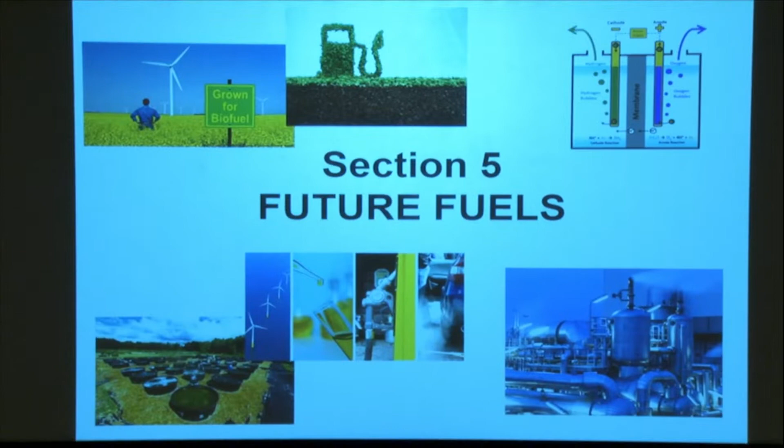I guess the reality is, historically, combustion has made up a very large part of our energy supply. From about the 1950s onwards, as the world has developed since the end of the Second World War, the utilisation of energy has grown massively - first in the West and in Europe, and more recently in China, India, the Middle East and other countries.

People are always telling you coal combustion's been used for decades and we'll still be using combustion for more decades. But the reality is this continued unabated use of coal, crude oil and natural gas, which has grown so much over the last 70 years, cannot continue unabated, because we will never reach the goals of the Paris Agreement, which is to get to net zero by 2050.

But why are we finding it so hard? The reality is that these fuels are relatively easy to extract and relatively easy to use, even though for the most part we're not using them at huge efficiencies. So it's quite a difficult habit to break.

Unless we put more effort into energy efficiency and reducing our demand, we've got an awful lot of energy demand to replace. And I don't think carbon capture and storage is really going to offset this huge amount of fossil fuel energy that we currently have. So we're looking towards new energy systems.

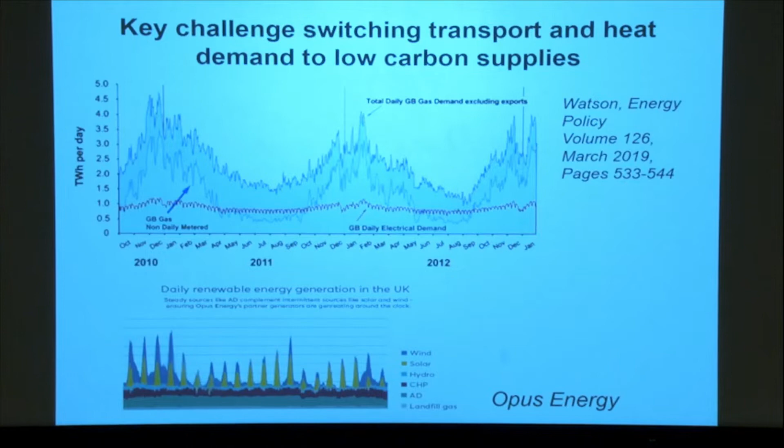But now we're getting to the stage where it's becoming difficult to utilize energy, and the offshore wind industry is growing still, which is a good thing. The problem is that if we look at our daily supply, it's intermittent because solar is only during the daytime, and will vary depending on weather conditions. So when it's cloudy, like it is here today, the supply from solar will be reduced. And wind also fluctuates according to the climate and the daily solar cycles.

Some days we have a huge supply of wind energy in the UK, but other days we get calm conditions where we get very little energy from wind. We've got a nuclear baseload and a hydro baseload, and in the UK at the moment, when wind is low, we have to top up with combined cycle gas turbines.

As we grow our wind capacity, this intermittency as an overall part of our grid is also going to grow with it. And that creates problems, because some days in the UK we create wind energy that we can't actually transport through the electricity system and can't use.

I was actually quite surprised when I looked into this further to learn that on 75% of days of the year in the UK, we actually curtail wind energy. So we've got wind energy available, and we're just throwing it away.

And that's clearly going to get worse as we bring new offshore wind farms online. So that's one challenge. The second challenge is...

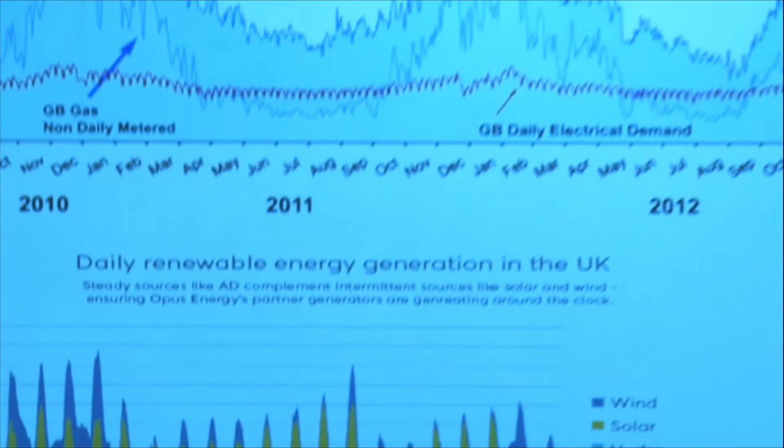So that's great because that reduces our overall energy demand. But our heat demand, of course, is in the winter months and usually in the evenings when the sun's gone down, right? So we have a massive mismatch between the electricity that we'll be supplying from wind and solar compared to the demand that we might make from using heat pumps to heat our houses.

So one way or another, we're going to have to do something to store energy.

I don't know how many of you get involved in Twitter and energy debates on Twitter. I find it quite a fascinating place to hang out, because basically there is a raging row going on between people who believe that everything should be electrified and people who believe that low-carbon fuels have a role to play. These are very polarized positions, as far as I can see, on Twitter anyway, but actually, even in the real world, there are people who fully back hydrogen as a future, and there are people who say that it's a red herring.

And actually, I'm interested in this, and I've done some work on wind energy as well. So I got a master's student to look at the overall energy demands of using heat pumps versus hydrogen for the UK. The overall electricity demand from using hydrogen is substantially higher because your hydrogen system is at best probably 90% efficient, whereas your heat pump system is 300% efficient. So it's very hard to compete.

But what the heat pump people don't talk about is how are we going to supply that electricity at times when our generation system is not going to be generating. And then they start to say, oh, we will have vehicles that will be connected to the grid and they'll have batteries. This is not going to work, right? That might give you a storage over 12 hours.

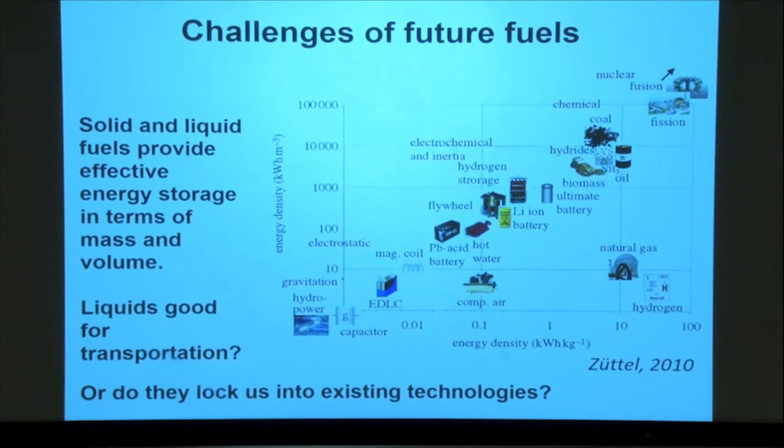Personally, I think as combustion scientists, we should be thinking about these overall questions as well as the fundamental question that we're working on every day in our lab or at a computer. I find it fascinating.

So one of the main issues that we'll have to grapple with is this issue of storage timescales. Here, combustion-based technologies or gaseous and liquid fuel-based technologies have some advantages. Chemical storage of energy is very good for long-term storage, and we have facilities already to do that. If we look at some of the other storage techniques, then not so much.

So flywheels are of the order of minutes. It's useful for restarting a grid, for example, or providing grid stability, but not that useful for providing winter heat. Same with batteries - useful for overnight storage, useful for vehicles where you can charge up overnight and use your vehicle the next day, but not going to be very useful for helping us provide an overall seasonal balance.

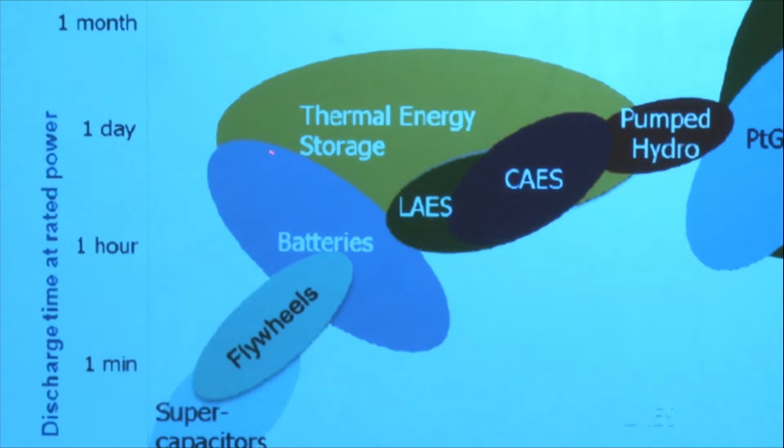And then we've got other techniques like compressed air or liquid air storage or thermal energy storage that are improving now and are kind of pushing up to several days worth of storage. But the advantage of fuels like hydrogen or synthetic liquid fuels or ammonia that I'm going to talk about today, or even biomass, is that we can store them for months. And that's what we're going to need - weeks at least, I would say.

So I think what I'm saying is that our future fuels are going to be part of an energy storage system, and without that, we're never going to decarbonize our energy use. My personal view is that, I don't know about the US, but in the UK, I think we're really very slow to realize this need for bringing storage onto our grid. I don't know if any of you have comments about other countries.

Can you shout? Sorry. Okay, right, so you're not leading the show - in the US it's even slower.

I think in the UK we're coming to a crunch point now because there are times, hours in the year, where we have excess renewables. So if you're charging an electric car at the moment and you have an agile tariff, some nights they'll pay you to take the electricity off the grid. Okay, we won't go into the UK energy market, it's a mess. But we're already pushing into that situation, and so why are we throwing away renewable energy? We should be facilitating storage techniques, and that could include making hydrogen.

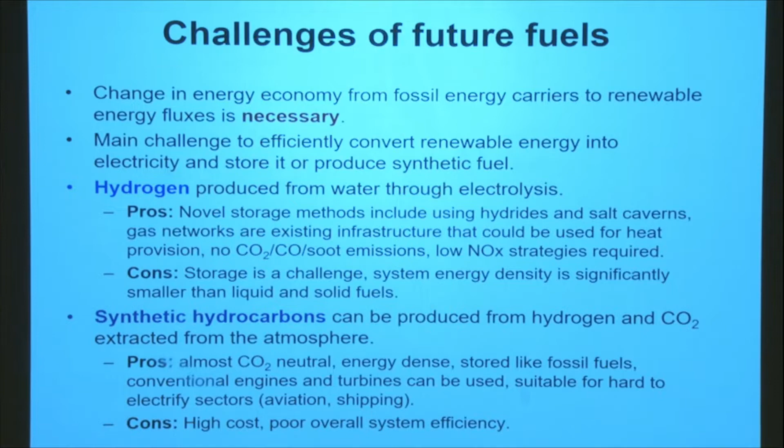The main challenge then is efficiently converting renewable energy into electricity and either storing the electricity or converting that electricity to some kind of synthetic fuel and storing that. Now the problem here is the word efficiently. As we move further down the conversion chain, the efficiency keeps decreasing.

We can produce hydrogen through electrolysis, and that's got an energy cost. We might then convert that hydrogen to ammonia, and then back again to hydrogen to burn it or use it in a fuel cell - there's energy loss there. Making synthetic liquid fuels is way down the efficiency curve.

Efficiency isn't everything. The two really important things are how much CO2 or greenhouse gases can we reduce, and how much is it going to cost? Solar is pretty inefficient, but it's cheap despite that. So efficiency isn't the only holy grail, but cost is going to come into this.

A quick run through one or two things I'm going to talk about. Hydrogen, then, we can produce cleanly from water through electrolysis, and actually we can do that from seawater as well, so it doesn't necessarily have to impact on water availability.

We've got methods to store this. In the UK, we're looking at using salt caverns, for example, and it can actually be stored in the gas network as long as we're not storing it in steel pipes.

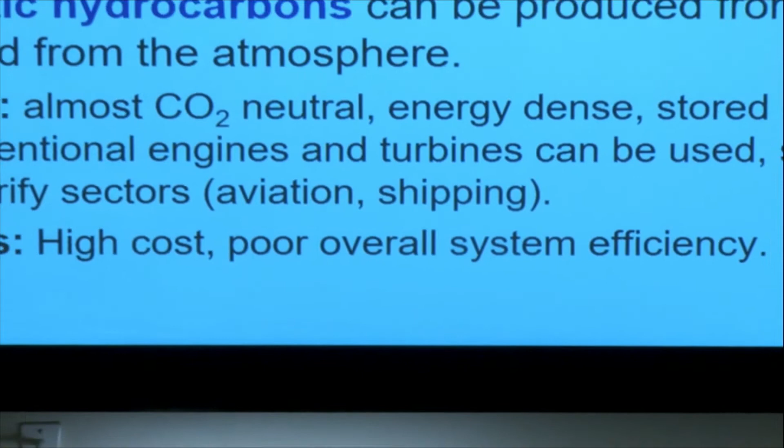The cons of this are going to be the high cost involved because there are lots of steps in the chain. The general rule with new technologies is that the cost does decrease over time. If you compare the cost of solar and wind now to 10 years ago, substantially cheaper. So we should be exploring these things in the hope that technologically we can make them more efficient and improve costs over time.

The other approach is to use renewable fuels that are not based on electricity production, but to use bio sources. I'm going to say a lot more about this later, but basically we can from bio sources generate fuels that look relatively similar to the ones we're used to burning.

Depending on the source of the biomass, if we're growing an annual cycle crop, for example, it's going to absorb CO2 back from the atmosphere through photosynthesis. So this should be a round-trip neutral CO2 process, but I'll show later why that's not always the case.

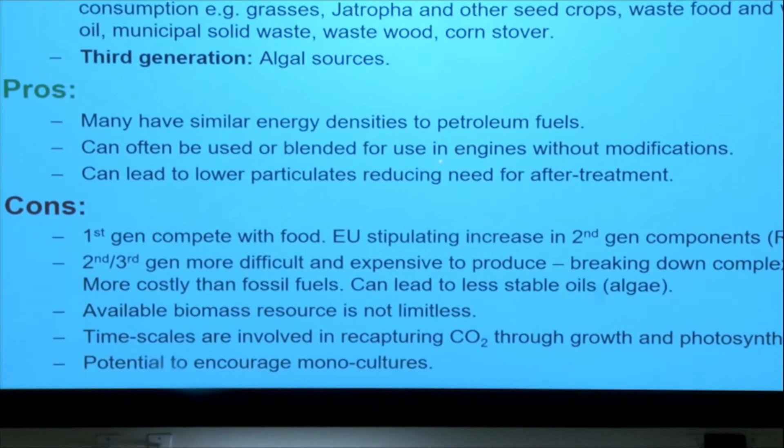I won't dwell here because I'm going to go through this later, but the pros of biomass are that we can create fuels with similar energy densities to the fossil fuels we're used to. We're already blending ethanol into gasoline without any modifications, but there are limitations on that. Biofuels can improve our emissions from combustion devices, which is also a benefit to air quality. The main downside of biofuels, of course, is the land use needed to grow them. And we cannot displace the whole of that fossil fuel demand with bioenergy because there simply isn't the total resource to do that.

I suppose the problem with trying to envision what the future energy system will look like is that it's going to be lots of different things, and we don't have enough information to optimize how much biomass we should use, how much hydrogen we should produce, how much we should be using heat pumps, how much we should be using hydrogen or electricity in industrial processes. We don't have that vision, and I'm a bit worried because we've only got 28 years to get to net zero globally. So we are in a bit of a rush, or we should be.

I'm going to go through some of these options briefly and talk about pros and cons at a very surface level.

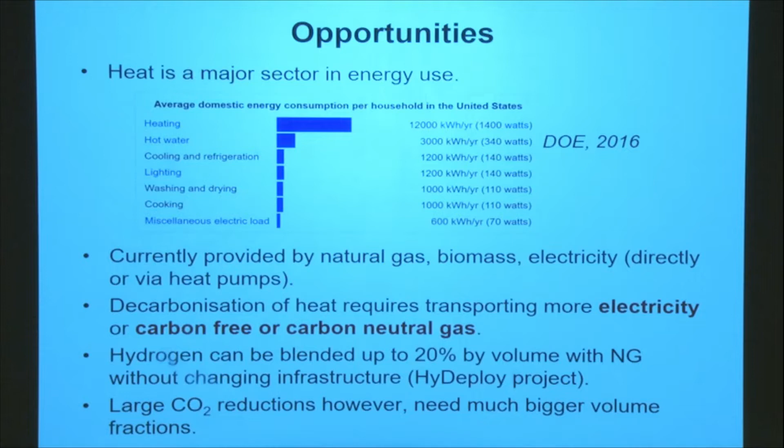But the problem then is that hydrogen has quite different combustion properties from natural gas, and blending it to higher proportions starts to create problems. As shown already yesterday, we have much higher flame speeds and higher adiabatic flame temperatures, which will consequently affect thermal NOx production. Hydrogen has very wide flammability limits, but it has a long ignition delay time, so it has a high octane number. In terms of material properties, it creates material embrittlement, so we can't put it through the same steel pipelines that we've been using for natural gas.

And in the UK, we are in the middle of a pipeline replacement process. I'm not sure if that was just happening anyway, or whether it's part of the potential to switch to hydrogen. But we're replacing a lot of pipes with polyethylene pipes, which should be hydrogen ready. That's about halfway through for the UK, but that would have to be completed.

So obviously one of the things we're trying to mitigate as much as possible is hydrogen leakage, because it has low minimum ignition energy, it's highly flammable.

One of the other problems is that hydrogen is very light and diffusive, and so if we want to store it efficiently, then we will have to compress it at very high pressures or store it at temperatures well below zero. There is an energy penalty, of course, in both of those storage methods.

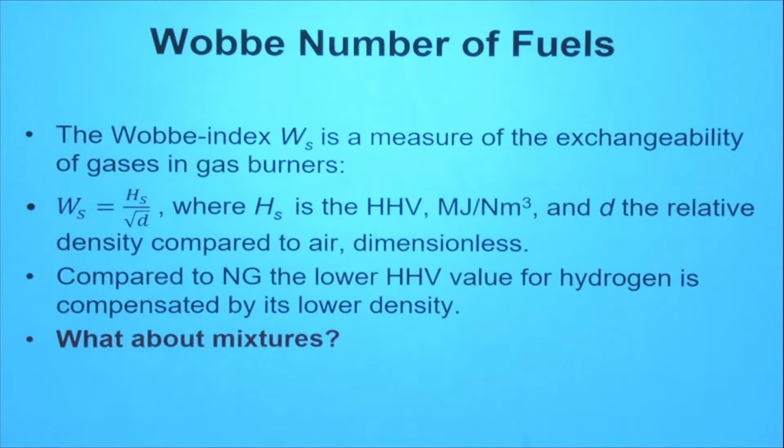What this is saying is that if fuels have a similar Wobbe number, then all other things being equal, they should be interchangeable within our burner systems. Hydrogen and natural gas are actually very similar, but the problem is that when we start to mix them, mixtures in between 100% of one or the other have quite different Wobbe numbers.

At the moment, we've decided we can test up to 20% hydrogen, and that's working. But beyond that, we fall out of the range of Wobbe indices that we can deal with in our current systems. It's actually not until we get to around 90% and above hydrogen that we move back into the regime we can use. So these intermediate mixtures, at least in the domestic supply system, are problematic.

Okay, that I've shown you already, so I'll move on there. I suppose I'm throwing in the question: how well can we model hydrogen? Because I'm sure that probably all the people modeling hydrogen in CFD are in the other session.

I've talked a lot about the elementary reactions of hydrogen on Tuesday. So we can do reasonably well, but there is a spread between models. There's probably been some models since this study was done, which is in 2010. Some models do better than others in terms of being able to predict the mass burning rate of hydrogen.

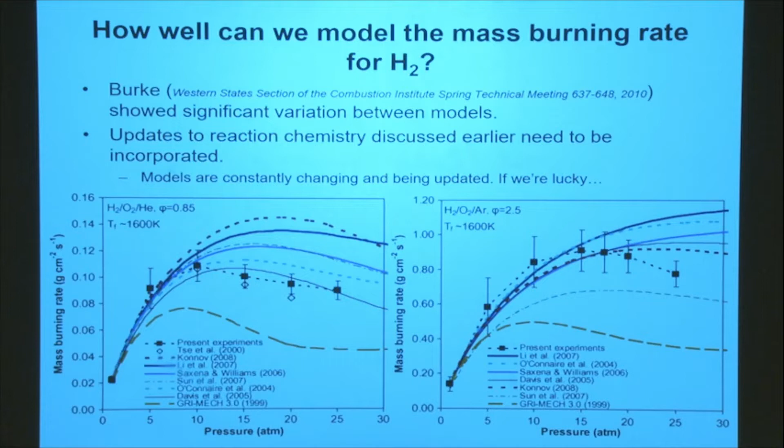The model that actually does the worst is the GRI Mech. I won't ask you to put your hands up if you're using GRI Mech. That's not a full criticism of GRI Mech, but it is 20 years old now, so we can do better than GRI Mech. Probably some of the updates to reaction rate constants that I talked about on Tuesday would help to improve this further. So I think in terms of combustion, there are a few different challenges with using hydrogen in our systems. One is how to control for thermal NOx.

So thermal NOx, of course, increases with temperature through the Zeldovich mechanism, which you may have come across before. And hydrogen has a higher adiabatic flame temperature than natural gas. But the advantage of burning hydrogen as a pure fuel is that we don't have to design around minimizing soot and CO, because there's no chance of them being formed. It's only when we look at mixtures that we've got a chance of unburnt hydrocarbons, soot, and carbon monoxide.

So hydrogen burners can't have a CO problem, in fact. There's no carbon in the fuel. And in terms of domestic use, the main hazard from natural gas is actually CO poisoning. So although we might want to worry about leakage of hydrogen in our homes, if we do use it domestically, it will actually reduce issues related to people being asphyxiated by carbon monoxide.

So what that means is that we don't have to worry about unburnt hydrocarbons in rich zones, for example, and we can start to think about cleverer designs to try and reduce the formation of thermal NOx. So, for example, we can burn rich and then have air staging, or we could burn lean to try and reduce NOx that way. So we've got lots of different options without having to worry about CO quenching in our systems.

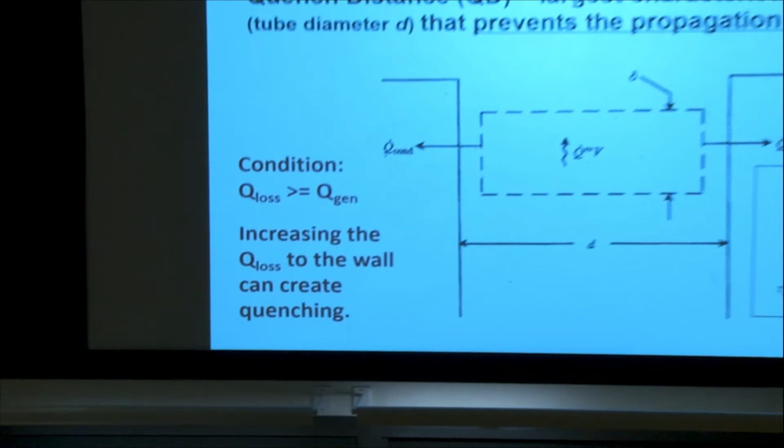That's one issue. The second issue, for those of you that have been coming to the morning lectures here, you will have heard about quenching. So the quench distance is the largest characteristic distance that prevents the propagation of a flame.

Well, the problem is that the quench distance for hydrogen, because it's so much more reactive, is substantially smaller than for natural gas. For natural gas, propane, etc., we're looking at maybe 1 millimetre at the very worst, 2 millimetres for DME, 2 millimetres for natural gas, for example. That's already quite small as a burner size. But for hydrogen, we're an order of magnitude different, so 0.2 to 0.3 millimetres. So if we think we can run a premixed burner device for hydrogen, the burner size has to be smaller than 0.2 millimetres. It's quite difficult to engineer, in fact.

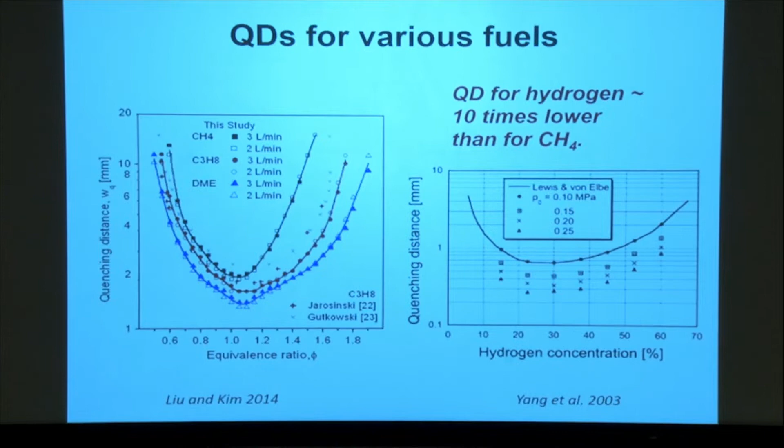One way around that, of course, is to not use a premixed system. So if we've got no oxygen coming through the burner pipe, we should have a much lower incidence of flashback, but we might still get air entering into the burner. So we really do have to design for this small quench distance. The two challenges here then are really to create small burner nozzles and to use diffusion rather than premixed flames, so non-aerated burners.

Another challenge for hydrogen is flame visibility. It's actually interesting to have conversations with people about this. What's people's view? Do people think that hydrogen flames are invisible? Anyone of that view?

No. Because I showed a picture of a fire that we designed at Leeds, and a colleague thought we added an additive to get the colour, which we hadn't. I think one of the issues here is that premixed flames are far less visible than diffusion flames, and there's some debate about where the colour is coming from.

My view is it's coming basically from emissions from water vapour. A lot of the emission is in the infrared part of the spectrum, which we can't see, but some of it does stray into the red and orange part of the electromagnetic spectrum. For diffusion flames, there's a paper by Schefer et al. suggesting a factor of 45 increase in emission intensity for diffusion hydrogen air flames compared to pre-mixed.

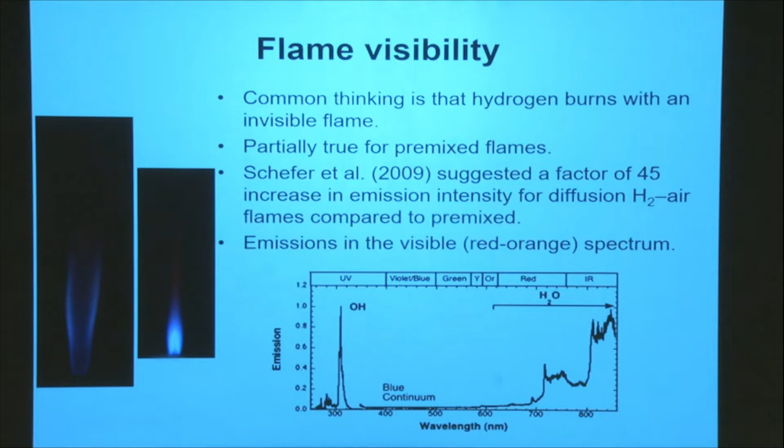So we've had some fun at Leeds trying to design a hydrogen fire. Whether it will ever come to market, whether we'll ever have hydrogen in homes, I don't know, but we learned quite a lot of interesting things.

The general design principles are that this is a non-premixed burner setup to improve the flame visibility, which looks reasonably good. We got money from the government to do this project, and the premise was that we should be creating a fire that looks like the ones people are used to having in their houses already. In a natural gas fire, some of the emissions are coming from soot.

But now we're getting this more red flame because it's coming from the water vapor. We use impingement cooling, which is relatively easy in these fire designs because they've got fake coals sitting on top to help us reduce NOx.

But what we found was we can create a fire design that has extremely low NOx, much lower than the natural gas reference fire we were comparing to. It wasn't very visible - it was visible in the dark, but not in daylight. So the argument that we shouldn't burn hydrogen because of NOx isn't really true.

We just have to redesign to prevent thermal NOx from forming. Very small burner nozzle size - I probably won't give you the details in case my colleague decides to patent that, but that was to avoid flashback.

There is a joint venture between Mitsubishi and Hitachi that have designed a diffusion combustor. Again, it's not a premixed combustor, it's a diffusion flame-based combustor using low NOx technologies. In this case, they're using steam injection to control for NOx, and they can operate with very high percentages of hydrogen in the mix.

Traditionally, NOx tends to be controlled in gas turbines using premixing, with lean operation in the primary zone reducing the temperature. But switching to hydrogen, because of flashback issues, makes premixing very questionable, so we need new strategies for NOx reduction. Steam injection is one suggestion, because steam reacts with the oxygen radical, suppressing its concentration, which inhibits thermal production of NOx through the Zeldovich mechanism.

I added this to the slides after I sent them for printing, so I guess the PDF will be put online. I can send the updated version, but I'm sure you all know the Zeldovich mechanism anyway. So steam injection is one possible way that we can control for NOx in hydrogen devices.

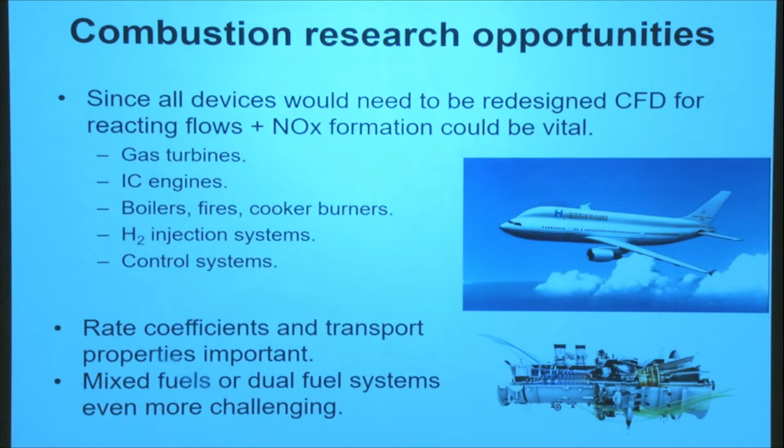I think one of the main issues is the starting point: how do we generate enough electricity to create hydrogen? I'm not really going to say much about steam reforming of fossil fuels to make hydrogen, because I don't think that's the way forward - but not everyone agrees with that. Until I see CCS operating at a very large scale, I haven't got a lot of faith in that as a method of hydrogen production.

So let's move on now to ammonia. Initially I was scratching my head about ammonia as part of a low-carbon combustion system, because I also work in atmospheric pollution and dispersion, and ammonia is always put forward as one of the unsolved issues in air pollution. At the moment it mainly comes from agriculture, because fertilization processes throw more nitrogen into the air than into the soil where we need it. So I was thinking, adding more ammonia to the atmosphere cannot be a very good plan.

But again, it's one of those situations where we have to control for NOx from using ammonia, and we also have to control for ammonia emissions - unburnt ammonia - so that ammonia doesn't increase in the atmosphere. So why are people even thinking about ammonia? It seems like an odd fuel, doesn't it?

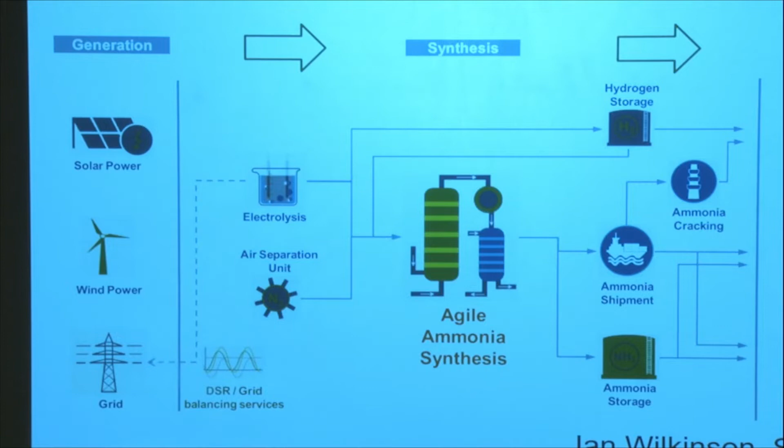So one vision is that we use our renewable power to generate hydrogen through electrolysis, and then synthesize that with nitrogen to give us ammonia. We already have a process to do that - it's the Haber-Bosch process. The downside is it's quite expensive in terms of energy. But ignoring that for now, we can store and transport our ammonia easily, and then either burn it directly, or crack it to give us hydrogen that we can use in fuel cell vehicles, or use in hydrogen gas turbines, etc.

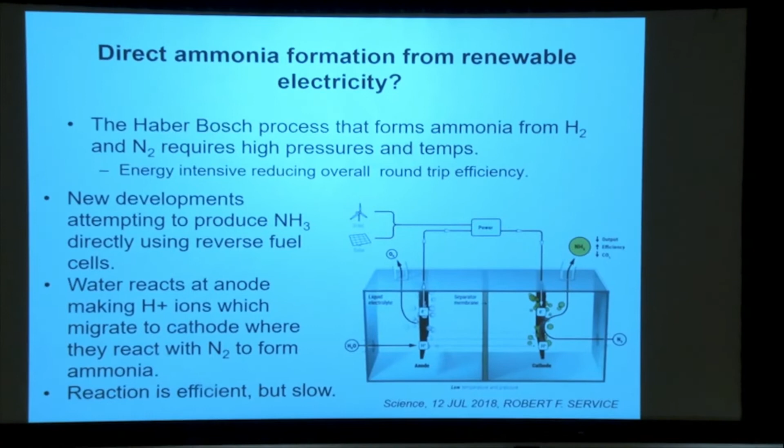This is a slide I've actually added. So the problem with the Haber-Bosch process, which converts from hydrogen and nitrogen to ammonia, is it requires high temperatures and pressures, and therefore it's an energy-intensive process. And we always should be mindful about this round-trip efficiency, how much of the energy loss is at each chain of the conversion.

But actually, there are some new developments. I'm not entirely sure how commercializable they are at the moment, but using fuel cell technology or reverse fuel cell to generate ammonia directly from electricity. This is potentially a way that we can store the energy that's in the hydrogen here without going through the energy-intensive Haber-Bosch process. So this is quite an efficient process, but the reaction is pretty slow. It's early stages, developments might happen.

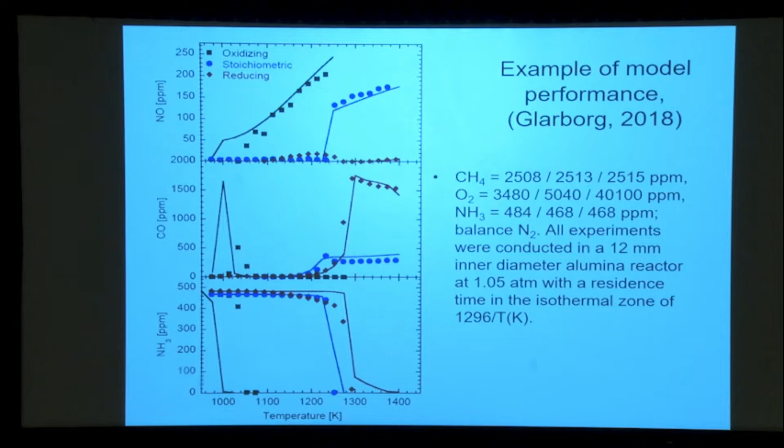I'll show perhaps a bit more of this study tomorrow. The Budapest group, Tamás Turányi's group in Budapest, have a series of pieces of work where they take an important fuel and gather all the mechanisms from the literature and compare them to give us a consistent way of comparing how well the mechanisms are producing wide ranges of experimental data. And they have done that now for ammonia modeling, for ammonia models.

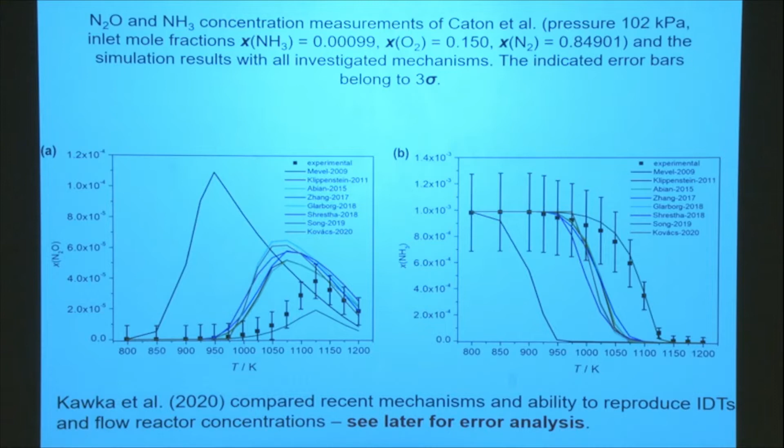So I don't know, probably got a few minutes just to start on the next section. As combustion scientists, we might be excited about turning electricity into liquid fuels so we can utilize a lot of the knowledge and skills that we've developed for fossil fuels. And there are a lot of potential advantages of power to liquid fuels. In some sectors, particularly aviation, they may end up being the only feasible choice. It's a bit early days to say at the moment.

So, big if, we have abundant renewable electricity. As I say, at the moment in the UK, we're nudging into days where we have hours at least of the year where we've got excess renewables. Then we can use those potentially to create hydrogen from electrolysis, and then we can turn that hydrogen with captured CO2 from the ambient air into a liquid fuel.

I reiterate the point that it has to be CO2 captured from the ambient air if we're going to use these fuels in an atmospheric process with no CCS. So why bother? Why not just store the electricity or store the hydrogen? Well, basically, because, as I said at the beginning, liquids have quite nice properties.

Ammonia is not suitable for aviation because we can't carry all that nitrogen around. It's no use from an energy perspective, it's just adding weight that we can't afford to carry. Hydrogen may be possible for aviation applications, but there are clearly safety concerns there. Otherwise, we're stuck with using biofuels in aviation, and again, what's the overall resource? So power-to-liquid fuels may well have applications in aviation, shipping, or heavy goods.

So the important thing then will be to make this process as efficient as possible. Obviously wind energy, not so much solar, but wind energy has become more and more efficient as turbines have got larger because they can access higher levels of wind resource above the atmospheric surface. Then we need to work on efficiency of electrolyzer processes for hydrogen production.

Okay, the tricky part here really is the atmospheric capture of CO2. So we do have various designs for capturing CO2 from the atmosphere. It's much more difficult than it is from a power station stack, of course, because the concentrations are low.

Well, here's a question for you: what is the global atmospheric average CO2 concentration right now? Well, yes, more than 420 now, but good. I got lots of answers because I asked that to my students at Leeds, and shouldn't everyone have a rough idea of where CO2 is?

But if you compare that to CO2 in a power station plume, we're talking much lower concentrations, and so much more air has to be moved through the device in order to capture the CO2, and that has an energy cost. Commercial CO2 capture — there's a system in Iceland, I think, which is operational. So there are operational systems, but a low number at this point in time.

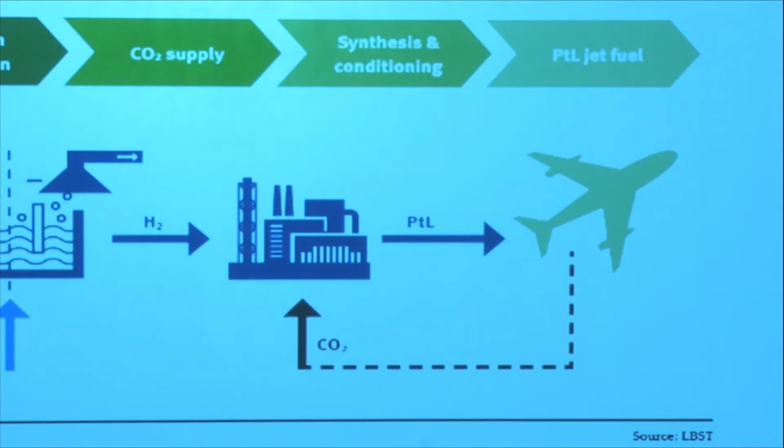Okay, so that's probably the sticking point at the moment, and the overall cost of this process — well, sorry, go on to the next stage. The actual synthesization of the fuels is fairly straightforward. The Fischer-Tropsch process has been in commercial use for a very long time, so we know how to make the fuels once we've got hydrogen and CO2. But the cost of this is going to be driven by electricity prices, because we need a lot of electricity to create the hydrogen, and we're going to need a lot of electricity to move enough air through our CO2 capture system to get the CO2.

Okay, so this is overall a pretty poor efficiency round-trip process to store as power-to-liquid fuels. But it will still be worth doing if we can produce electricity cheap enough. And if not, we're just going to have to pay twice as much to fly from Leeds to Princeton. I guess that's the bottom line.

Okay, so let's just take a break there.

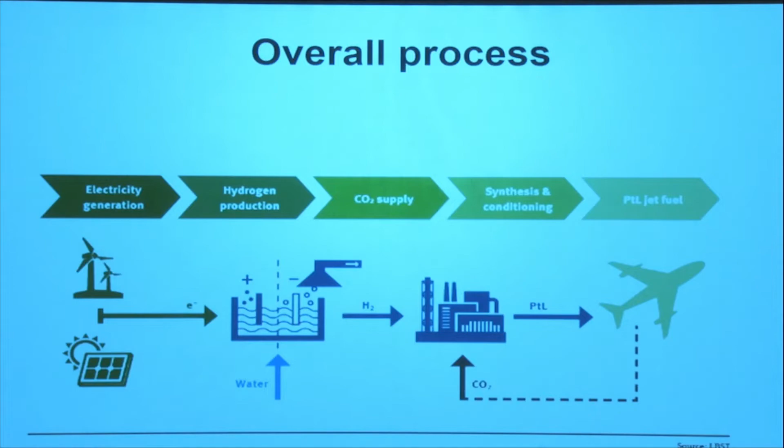So we're in a short section on power-to-liquid fuels, and here we're just thinking about the possible advantages and disadvantages, maybe relative to biomass-based fuels. One of the advantages of power-to-liquid fuels is that they have high energy densities, both in terms of mass and volume, and we do have huge renewable power potential. Now, how quickly we realise that and actually generate renewable power using wind and solar is, I suppose, a different question. That's a political question, because we do have the technologies to easily do it.

That's not necessarily a technical issue. Power-to-liquid fuels, we'll see in a minute, we can tailor them, and we can make nicely behaved fuels so that they will be lower in aromatics than traditional fuels, zero sulfur compared to traditional fuels, and we should be able to burn them fairly cleanly and drop them into combustors that we already have.

The main disadvantage is going to be the cost, because it's going to depend on electricity costs that will drive the cost of hydrogen production from electrolysis and direct capture of CO2 from air. And there are still a huge number of people that believe CO2 capture from air is never going to happen. So there are a lot of diverse opinions in this field.

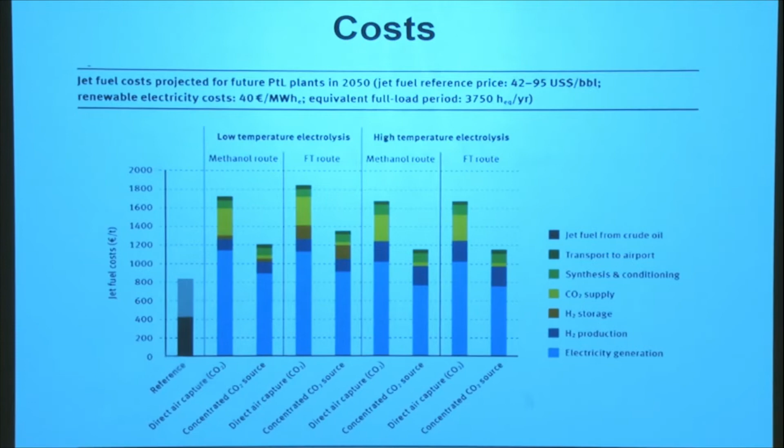So this is a projection to 2050 for a possible jet fuel that will come from this power-to-liquid process. The reference is the current projected price of jet fuel from crude oil, and then we compare different routes via low temperature and high temperature electrolysis to power-to-liquid fuels via the methanol route and the Fischer-Tropsch route, which I'll briefly mention in a minute.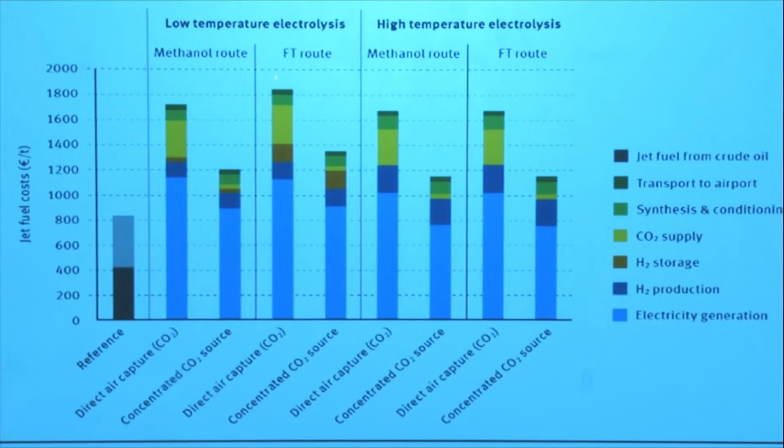Obviously, the overall costs are lower if we get our CO2 from a concentrated CO2 source. But the problem there is, if we're then using the fuel in an aviation context, we're not going to capture the CO2 back. So I would just put a cross through this. I don't see how this is relevant, because that's not a carbon neutral process.

Overall, there's not a massive difference between the methanol and the Fischer-Tropsch routes. We're looking at projections of twice the cost of the fossil fuel price. But if you'd followed the projected costs of wind energy over the last 15 years to now, the projected costs and the actual costs deviate massively — projected costs for wind energy are much higher than they actually are now. So these projections change very quickly.

So there's two principal routes for power-to-liquid fuels, based on the assumption that we've generated our hydrogen and captured CO2. The first is the Fischer-Tropsch process, and the second is methanol synthesis and then conversion. We've been using the Fischer-Tropsch process for a very long time — this is well-established technology, and the fuel standards already allow for a 50% blend of Fischer-Tropsch synthetic fuel in a mixture.

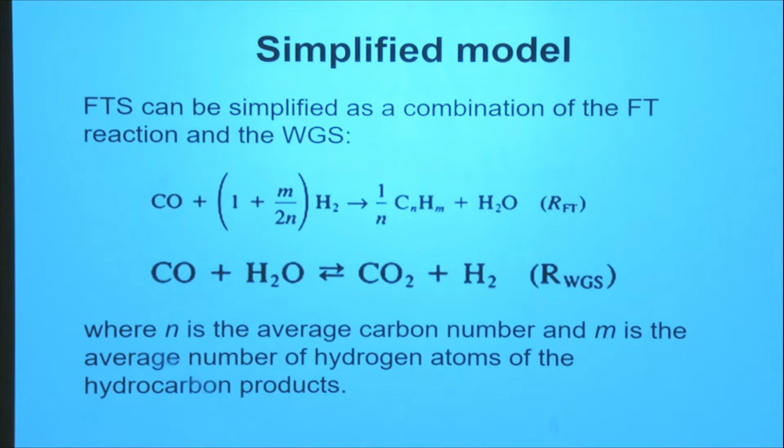So, I don't know, anyone working in the field of catalysis? Oh, okay. Because I think actually there's a lot of scope in terms of alternative fuel generation for development of catalysis processes. So the Fischer-Tropsch process is a catalytic process.

There's a range of possible catalysts that we can use. We have a bit of a gap, really, of detailed heterogeneous reaction kinetics. Don't ask me any questions about this, because I don't know anything about it, really. And actually, I think it's something that we, as a community, have been very slow to pick up on. A lot of these processes are happening on catalyst surfaces, and there's a big gap in our ability to be able to model those. But if we could model them, then we can potentially use our model to come up with an optimal reactor design and to give us product selectivity.

So the main products are going to be linear alkanes, alkenes, and possibly alcohols, although we may want to upgrade to remove the oxygen from our system. I've just given the overall pathway, possible pathways here. But obviously this is not gas phase kinetics.

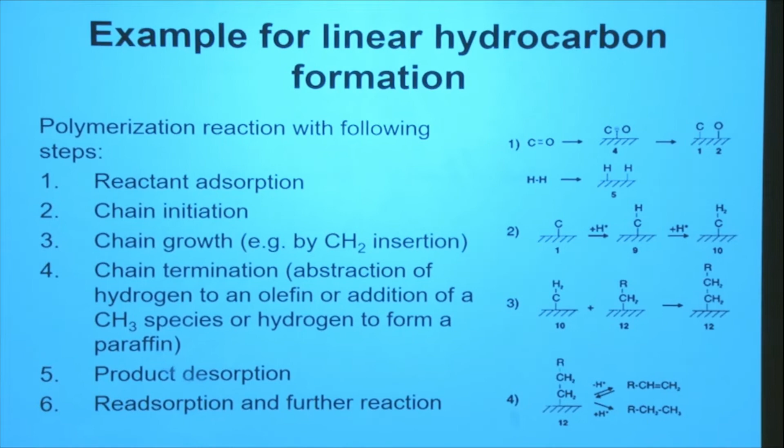So the people who are involved in catalysis, do you do any modeling? Yeah, okay. So that's the sort of skills that are needed to tailor these processes.

I think I've just put one slide in on methanol synthesis. So again, it's a catalytic process for synthesizing methanol from CO2 and hydrogen. And I think there's a large range of catalysts probably under investigation for this process. I don't know an awful lot about the catalytic field, but my experience of it from colleagues who work in this field at Leeds is that it is a bit of a run some experiments with a given catalyst at a given set of temperature and pressure conditions, and try another one. And it's quite a trial and error type design process, which I think would benefit really from more detailed modelling.

So the yields from the process are highly dependent on the choice of catalyst, the process conditions, and we're not very good at optimizing that. We were mainly using trial and error experiments.

So once we've got these fuels, how do they behave under combustion? The main features of a Fischer-Tropsch fuel are that we can tailor for high cetane numbers, which means they could be quite good diesel replacements. We've got low aromatic content in the fuel, and that will have an impact on soot, of course, and low sulfur, which is also advantageous.

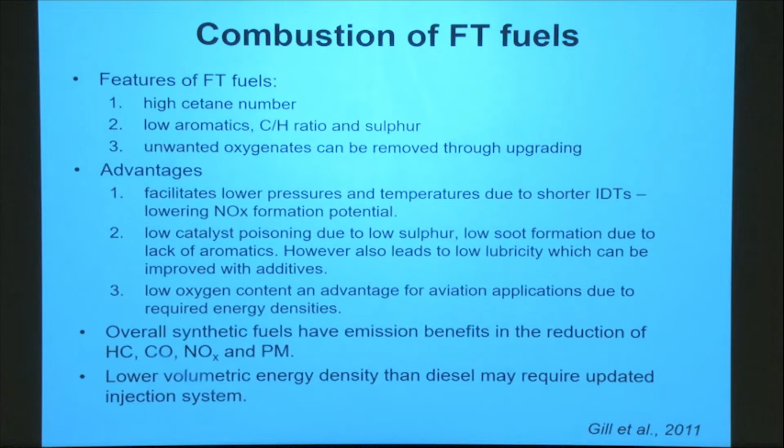But sulfur does have a tendency to spoil catalysts that we might use in engine after-treatments on combusting these fuels. So a low sulfur content is advantageous from the point of view of other pollutant mitigation, like catalytic converters, diesel particle filters, etc.

And if we want to, we can go through another process to upgrade, removing the oxygen. So we've got several advantages here.

The shorter ignition delay times that come from having a high cetane number facilitate lower pressures and temperatures, and that lowers the thermal NOx potential. We've got low tendency for catalyst poisoning because we've got low sulfur content. We've got low soot formation potential due to the lack of aromatics. But that aromatics in fossil fuels are there partly to improve lubrication, but we can add additives to fuels to do that if we want to.

So low oxygen content of these fuels is more advantageous from an aviation perspective than some of the biomass fuels I'll go on to talk about in a moment, because of the weight issue that we have for aviation. Okay, so overall we've got emission benefits compared to fossil fuels from synthetic fuels. The problem is going to be the cost of producing them mainly.

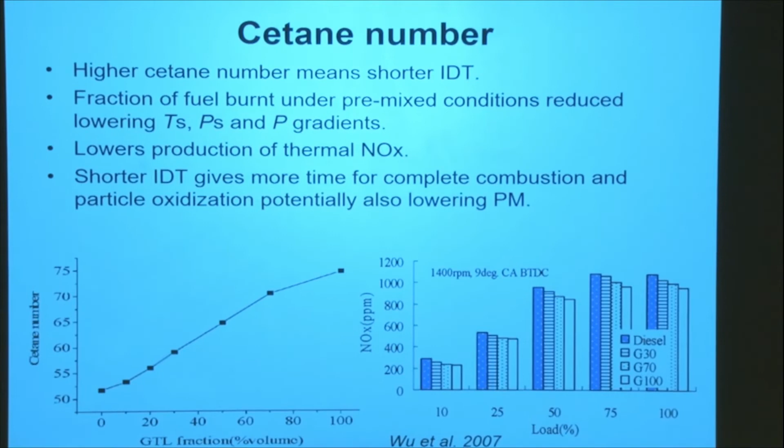Okay, so I think this is just probably reiterating what I said on the last slide. The high cetane number means we've got a short ignition delay time, so the fraction of fuel burnt under premix conditions is reduced, lowering the temperature and pressure gradients, and that lowers the production of thermal NOx.

There's been some experimental measurements comparing different gas-to-liquid fuels, in this case, not power-to-liquid, for different percentage volumes, and you can see that as you increase the percentage of the GTL fraction, we see small reductions in NOx. I'm not entirely sure if I'm going to show any NOx for biofuels, but we don't always see NOx reductions from blending biofuels like alcohols into diesel and gasoline — sometimes we see small NOx increases. So guaranteeing NOx reduction is a useful thing for synthetic fuels.

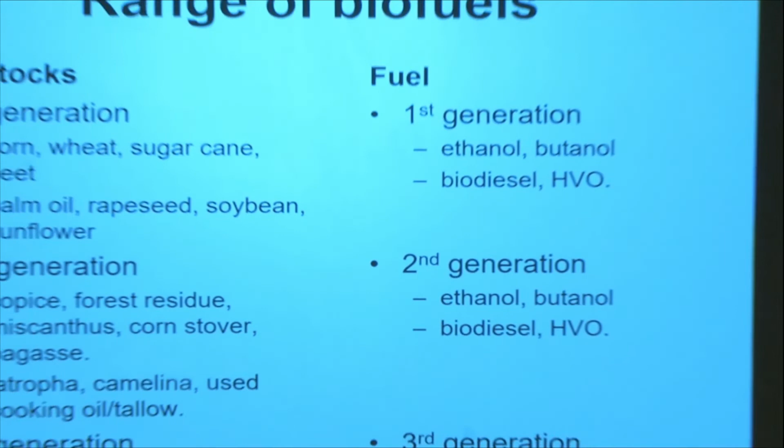So biofuels is an interesting topic because some people are vehemently against biofuels, but I think the problem is that you can't treat biofuels as a single entity, right? The range of feedstocks is huge, and the range of products that we can generate from those feedstocks is also huge. So there's no such thing as 'biofuel.'

There are lots of different combinations, some of which we should be avoiding because they have pretty poor life cycle CO2 emissions, but some of which might be a useful source of energy. So we need to delineate rather than saying biofuels are good or biofuels are bad — it really is a lot more complicated than that.

So in terms of policies, we classify biofuels as different generations of feedstocks. Historically, most of our biofuels have come from first-generation feedstocks, and this is where some of the issues, I suppose, in terms of perception have come from, because these feedstocks, as you can see from the list here, are all potential food sources.

So corn, wheat, sugarcane, beet — that would go on to produce something like ethanol that we're blending into our gasoline. Palm oil, rapeseed, soybean, sunflower — that will go on to be producing biodiesel. So our first-generation feedstocks will go on to produce first-generation fuels: ethanol, and I've put butanol because we're working on it, so I like it.

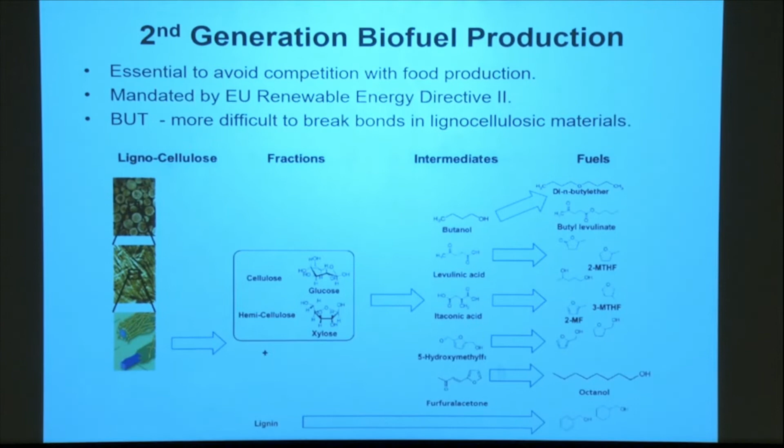There are lots of different options for second-generation biofuels, but we've got to come up with processes where we can improve the yields of production from these. The European Union is now mandating, as we go forward, higher percentages of these second-generation biofuels in fuel mixtures, so this has to happen.

Other types of biofuels we might be interested in looking at are furans, and long-chain alcohols - the group from Aachen and collaborators have been working on these, octanol being an example. As we go to longer and longer chain alcohols, they behave more like the equivalent alkane, so octanol has a high cetane number compared to ethanol and butanol. We've also got ethers: dimethyl ether, diethyl ether, and dibutyl ether.

Levulinates, which is something we're working on at Leeds with Trinity College Dublin, and blends of any of these that we might use to tailor fuel properties - I'll say more about that later. At this stage, correct me if I'm wrong, but I think apart from DME, none of these are at the highest level of technology readiness, so commercially available.

Ethanol from first-generation crops is produced via acid hydrolysis and sugar fermentation using enzymes, followed by distillation and dehydration. But the conversion of lignocellulosic biomass is more difficult than hydrolysis of starch, because you've got carbohydrate polymers like cellulose and hemicellulose, and then the remaining lignin. None of these are soluble in water, so we have to be clever about how we create sugars from these starting compounds.

So currently we're looking at higher production costs. We either need to engineer new strains of enzymes to tackle these more difficult starting compounds, or we need to use other thermochemical methods, such as pre-treatment of the biomass, for example, as one possibility.

Biobutanol, as we'll show later, is in some senses a nicer fuel for blending than ethanol, with some favourable properties. So why are we not using it? There used to be a biobutanol plant in the UK, I think in Hull, but it's no longer operational. One of the problems with biobutanol is the lower yields compared to ethanol. Unfortunately, the enzyme strains we used to create biobutanol were sensitive to the biobutanol concentration, so when concentrations got above a certain value, the enzymes died, and it was difficult to get to high yields.

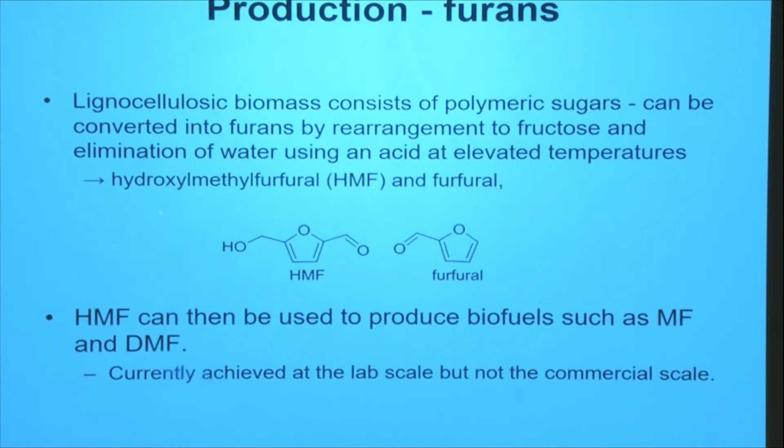We can produce furans using acid hydrolysis at elevated temperatures. These things are hard to name when you've had a long day. Hydroxymethylfurfural, or HMF, and furfural can be produced, and then further upgraded to produce biofuels like methylfuran and dimethylfuran. At the moment we can do that at lab scale, but it's not being done at commercial scale.

DME is something which can be produced at commercial scale, and there are dedicated engines designed to operate on DME. DME can also be produced from lignocellulosic biomass, so it could be a potential second-generation biofuel. In this case, the biomass is gasified to produce syngas, a high-temperature process which breaks down cell walls to produce syngas. The syngas is converted to methanol by the process shown on the earlier slide, and then the methanol can be dehydrated to give us DME.

DME can also be produced from wind-based electrolytic hydrogen and carbon dioxide, the renewables process I mentioned earlier. It's interesting to compare the life cycle greenhouse gases for those different production processes. I'm introducing now, for the first time, life cycle analysis. Has anyone ever been involved in doing that kind of analysis? No, we're all combustion scientists.

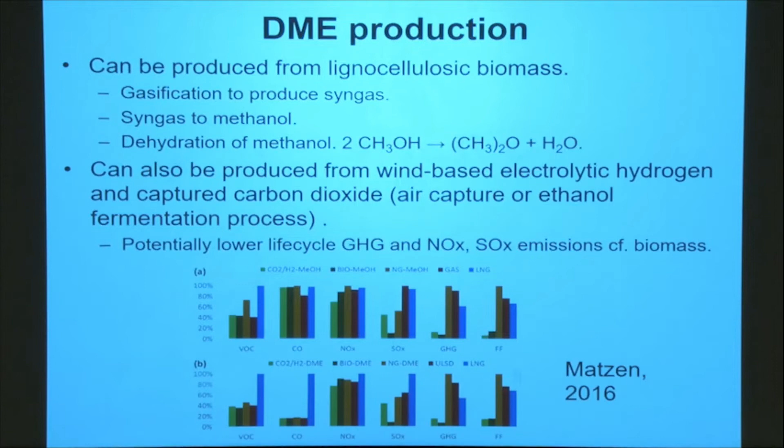But at the end of the day, this is an important component in trying to decide which of these pathways, for example from renewable electricity or from biomass to alternative fuels, is best. Because really we're trying to get the process with the overall optimal costs, as well as overall savings in terms of greenhouse gas emissions, and potentially the lowest air pollutant emissions too, since we also need to improve air quality.

This was a study attempting to look at different routes to DME. The first is from CO2 and hydrogen, a kind of renewable energy route. The second was from bioprocesses. The third from natural gas - actually I can't remember what that one was. And then liquid natural gas is the last one.

If we look at the overall greenhouse gases, the renewable electricity and biomass routes are the lowest, and in fact they also compete in terms of other overall emissions - VOC, CO, NOx, etc. So compared to the fossil routes, the environmental life cycle shows massive reductions from renewable sources.

So I just want to say a bit more about the carbon footprint of fuels. Don't worry too much about the transportation distance for the fuel here, but we just want to look at the relative carbon footprint of various different options here.

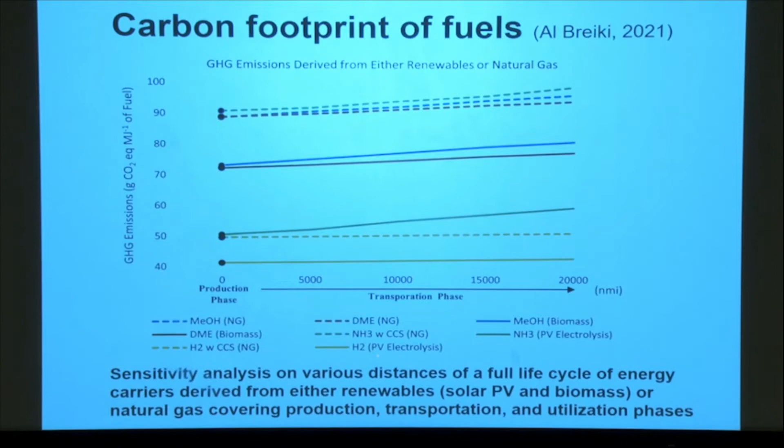Okay, so let's look at the rankings of the different fuels here. So maybe not surprisingly, really, that the lowest here is going to be hydrogen production from photovoltaic electrolysis. So it has a very low CO2 emission.

And theoretically possible, but not happening in reality, I suppose, is H2 from natural gas, but with carbon capture and storage. So this is a steam reforming route. It's not as clean as electrolysis from green electricity.

Then next up is when we convert the hydrogen to ammonia. Of course, there's a penalty in doing that, particularly if we use the Haber-Bosch process. So that has a higher greenhouse gas emission.

And then we go up to methanol from biomass and DME from biomass here. So biomass life cycle emissions in this case look worse than using renewable energy.

And then at the top, we've got methanol from natural gas, DME from natural gas, and even ammonia with CCS from natural gas is quite high.

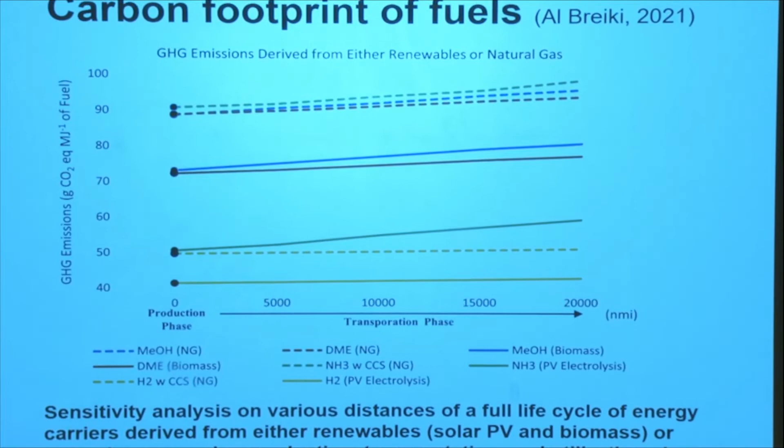Okay, so this suggests really that from a life cycle point of view, hydrogen from renewable electricity is looking pretty good from a CO2 equivalent point of view.

So what are the important properties then of potential biofuels? Well, they must meet the stipulated CO2 equivalent reductions that are stated in the Renewable Energy Directive. So that's 50% reduction compared to the fossil fuel reference.

The physical properties need to be suitable for blending at the moment. So as I say, we're already using 10% bioethanol in our gasoline, but we need to get much further than that if we're going to continue to use liquid fuels in transport. And we'll see a bit later on that there's a huge number of physical and chemical properties that we need to match in order to create drop-in fuels for blending. Viscosity, flash point, density, energy density, hygroscopy, etc. I'll show some examples. They need to be non-toxic, or at least no more toxic than petrol and diesel.

And they need to have appropriate chemical properties. So for diesel blending, of course, that means high cetane numbers. For gasoline blending, high octane numbers and high octane sensitivity. We need good heating values. We need low emissions of NOx, PM, unburnt hydrocarbons, CO, etc. And ideally, we need high yields from the biomass source, or at least the process needs to be cost competitive. And for second generation biofuels, that's currently challenging.

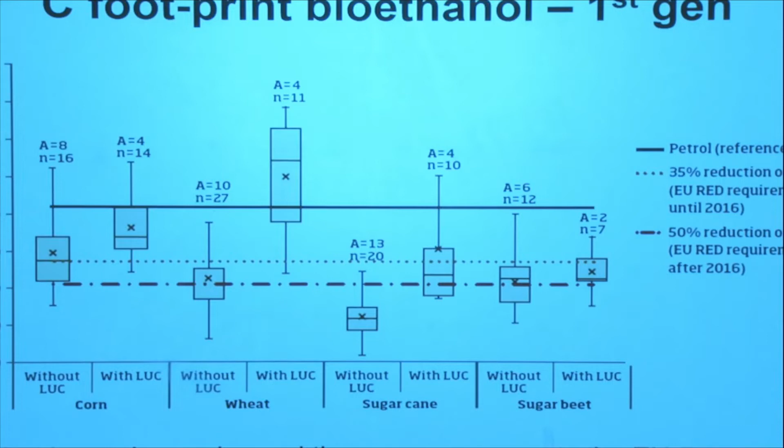Okay, so what we're trying to estimate here is the carbon footprint in terms of CO2 equivalent per megajoule for our fuel, and compare that to, in this case, the petrol reference, and then where we're trying to get to in the European Union, at least, which is 50% reduction according to the Renewable Energy Directive requirements.

Okay, we've got some box and whisker plots which are giving you an idea of the uncertainties in these estimates, based on the assumptions made. The cross will be the most likely estimate, but we've got some quite large error bars here.

So if we look through the first generation biofuels, we're looking here at bioethanol being produced from corn, from wheat, from sugarcane and sugar beet. And actually there's two columns here for each fuel. So the first one is ignoring the potential influence of land use change on greenhouse gas emissions.

So that's saying, okay, we're not taking into account any potential. For example, if we take over a forestry area and then we deforest it to create land for agriculture, there's a big impact of that land use change. And so it is really important that we should take into account that land use change.

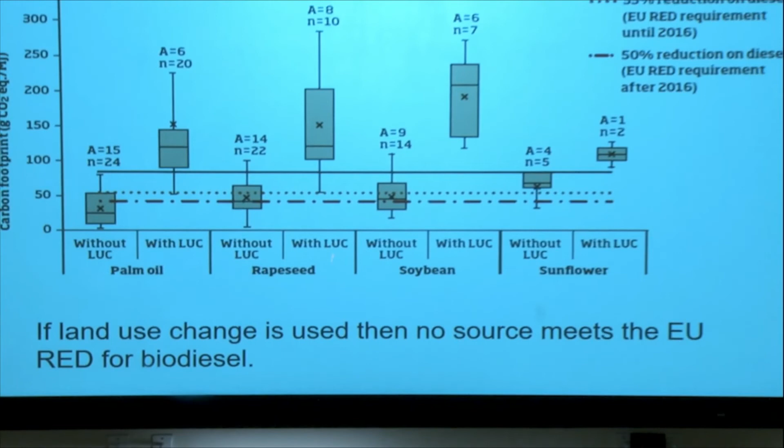Let's look at biodiesel first generation. So the feedstocks are different here. They're oil-based: palm oil, rapeseed, soybean, sunflower. And again, if you take into account land use change, none of these even meet current diesel, let alone the Renewable Energy Directive requirements. Only really if you don't have an influence of land use change can you meet the RED directive with biodiesel.

So if we move on to second generation then, this is obviously the reason why we are moving on to second generation. So we've got a range of potential fuels here: dedicated energy crops like short rotation coppice, miscanthus grass, switchgrass, and also agricultural waste from forest residue, corn stover, bagasse, etc.

Actually, these have much lower life cycle CO2 emissions than first generation biofuels for two reasons. One, if something is a waste product, then from an accounting perspective, you don't have to count the embedded CO2 in it, because the accounting process will attribute the CO2 to the primary product, right? So this is a mathematical shift, which you can go home and ponder over whether that's fair or not.

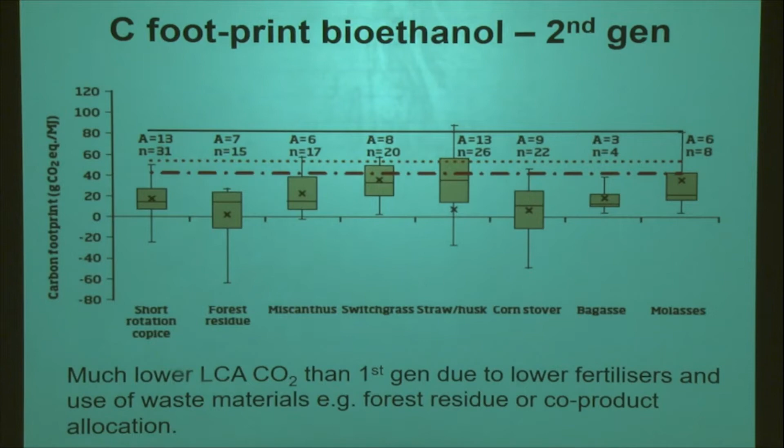I'm going to push past the next break, am I? 15:15. Are you sure? Oh, okay. Oh, sure.

Let's look now at some fuel properties. We're combustion scientists, and it's only recently that I started thinking a little bit outside the box. We thought, oh, we can calculate cetane number, or measure cetane number, or octane number, or ignition delays. Then we actually started to think about generating a drop-in fuel and realized there's a massive list of things we need to match in order to do that, unless the regulations are going to change. This list has got an 'etc.' on the bottom, so it's not even the whole list.

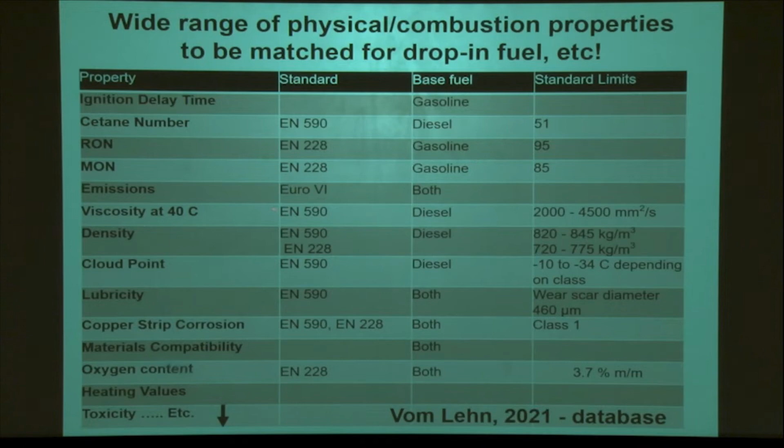The standards are related to cetane number for diesel - this is the European number, the US one is lower - and the research octane number and motor octane number, which are for gasoline blends. I haven't put the US standard here; this is a Eurocentric plot. There are also Euro 6 standards for emissions from the vehicle. An interesting question is where the UK now stands in relation to these European standards - I don't even know the answer, but we're buying vehicles made in Europe, so presumably they still meet Euro 6.

We've got standards on viscosity at 40 degrees C, standards on density, standards on cloud point temperature, which is the temperature where precipitates will start to form in our fuel. We've got standards on lubricity, on corrosion, on oxygen content, etc., etc. So if we're trying to generate a drop-in fuel from biomass sources, we've actually got to think about all these things.

Just as a simple property comparison, comparing ethanol with isobutanol here - they've got quite different vapor pressures, different octane numbers. Ethanol is better at resisting knock than isobutanol, but the energy content in terms of a percentage of gasoline is pretty low for ethanol.

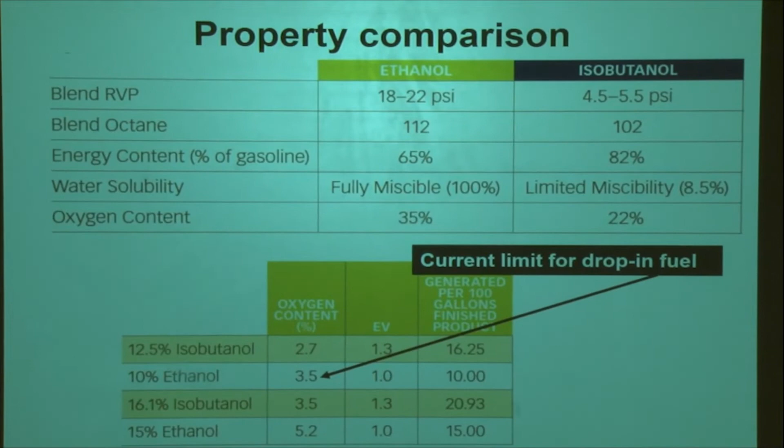So when we went from 5 to 10% ethanol in our fuel, not that long ago, a few months ago, there were a lot of complaints in the press about people saying they had to fill up their tanks more often because the energy content is less. Actually, butanol is favourable in that sense, and the oxygen content of butanol is lower.

That would be useful in terms of the blending walls, because at the moment in the UK we can't get above 10% ethanol, because that takes us to the limit for oxygen content of 3.5%. But that would actually be equivalent to a 16% isobutanol blend, which I think is the US limit for butanol in fuels. So if we can generate second generation isobutanol, we can put more of it into our tank currently than we would be able to do for ethanol.

There's a comparison slide here for the Furans with RON 95 E10 gasoline, which is what we have standardly in the pumps now. So the lower heating value for the Furans is actually more similar to gasoline than ethanol.

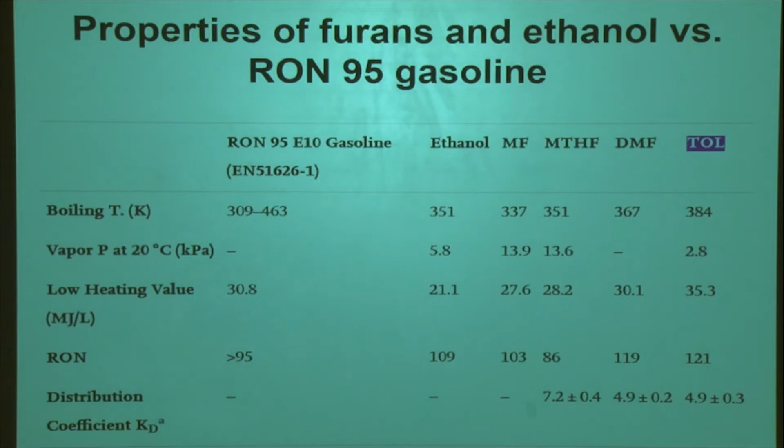So I mentioned flashpoint yesterday. Gasoline's very volatile already, and so in the fuel tank, the vapor's too rich to be flammable.

So adding ethanol or butanol or any of these other drop-in fuels to the blend is going to change the lean and rich limits, and also going to change the overall flash point of the blend. So we still have to meet the flash point.

Well, not for gasoline actually, but for diesel we still have to meet the flashpoint limits. Well, the worry for gasoline is that actually we will move back into

a leaner situation where we're within the flammability limits for the fuel blend.

Typically, gasoline's not going to form a flammable mixture until the ambient temperature is below minus 20 degrees C, which is the rich limit.

But when we add ethanol, the higher flash point and the different stoichiometry is going to make a potential explosion more likely at ambient temperatures.

There has been some measurements done in Sweden which has shown that E85, so that's 85% ethanol, has a flammable mixture at commonly found atmospheric conditions of 2 to 5 degrees and down to minus 18. So longer carbon chains are going to increase the flash point.

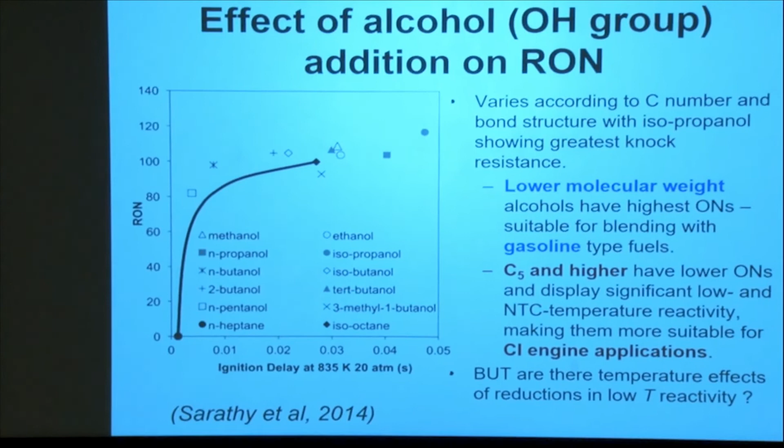I did talk about this yesterday, but to reiterate: for alcohols, if we've got a short-chain alcohol, there's a much stronger influence of the OH group on the alcohol, and that will tend to retard low-temperature chemistry and make those short-chain alcohols more suitable for blending with gasoline-type fuels, where we want high octane numbers and knock suppression. So for ethanol, across the range, we've got longer ignition delays than we do for gasoline.

For the butanols, I think I showed that for most of the temperature range, for N-butanol, we've got longer ignition delays. And for isobutanol, I'll show later, we have got longer ignition delays over the whole range. But when we start to go to the longer chain alcohols, the influence of the neighbouring OH group is less, and these start to behave more like alkanes. So C5 and higher are going to have lower octane numbers but higher cetane numbers, and so these are more suitable for diesel blending.

So I just put in here an example of a suggested long-chain alcohol that's got a high cetane number and therefore might be more suitable for diesel blending.

It's part of the tailor-made fuels from Biomass program, which is, I think, led by Heinz Pitsch, anyway, wherever Heinz Pitsch is. And then there's another group working on octanol production process via acetone and furfural from biomass. So this is a synthesis process involving the furans, but actually a conversion process that's giving us basically a straight chain alcohol, and that will have physical and combustion properties that are more similar to diesel.

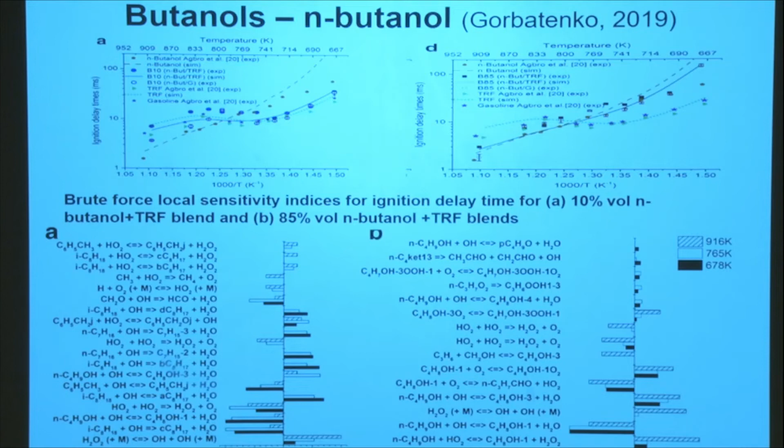The crossover temperature is slightly different, but there is a temperature dependency on the ability of these fuels to suppress knock. And the reason for that really is that the underlying gasoline has this NTC region, and so there is a region where there is an influence of that.

This is a similar example from N-butanol. I showed some of this data yesterday. Let's just ignore the complicated sensitivity analysis for now.

The gasoline or gasoline surrogate has this weak NTC, whereas N-butanol doesn't have quite Arrhenius behavior, but it's more Arrhenius-like. At the lower temperature region, it's actually lengthening the ignition delay time, slowing down the low temperature heat release. But the crossover temperature here is slightly lower than the ethanol plot I showed. At higher temperatures, N-butanol actually increases reactivity and shortens ignition delay, because gasoline is going through this negative temperature coefficient region where increasing temperature makes the fuel-air mixture less reactive. So there's an interaction between the NTC and the influence of the alcohol we're blending.

I won't dwell on this plot, it's not too easy to interpret, but basically when we submitted the paper showing that, the referees didn't quite believe it was real and suggested it was some facility effect from the RCM. But we actually did some spark ignition engine tests as well, and we saw that same type of crossover behavior. So I am reasonably confident it's not an experimental quirk, that it's actually a real effect.

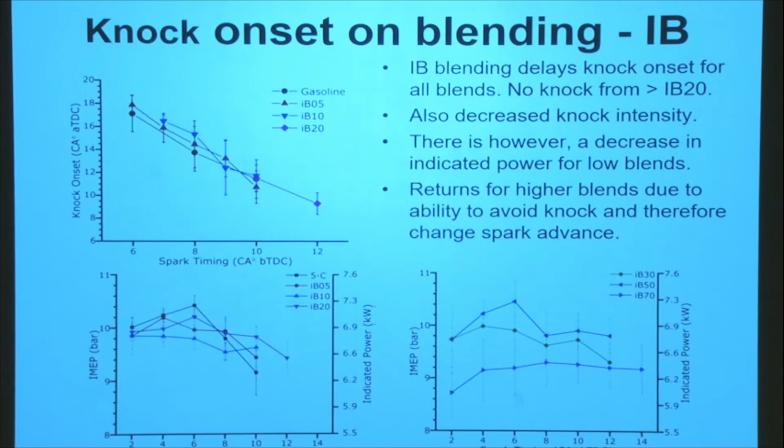Another thing we're concerned about, and of course purchasers of fuel are going to be concerned about, is whether we're going to lose any power from blending these fuels into our engine. We've already said that ethanol has a lower energy content, so you get slightly less miles per gallon from blending more ethanol. But how will it affect engine performance? And that is related to where the knock boundaries are for the fuel.

So we looked at quite a number of different blends of isobutanol with gasoline, and basically in general the isobutanol blending delays the knock onset, and actually above 20% we don't see any knock in the engine, and all the blends decrease the knock intensity.

The problem is if we don't change anything, then the lower butanol blends give us a drop in the indicated power. The gasoline surrogate is the black line here, with peak power around 7.2 for the gasoline. As we add more butanol, that peak drops, and the spark timing where the peak occurs shifts. So we could, by shifting the spark advance, actually recover the same power, even at 50% butanol blends. When we get to 70%, there is no opportunity to do that. So the fact that the fuel is knock-resistant allows us to change the spark timing to recover the indicated power back, and that's actually quite a useful property.

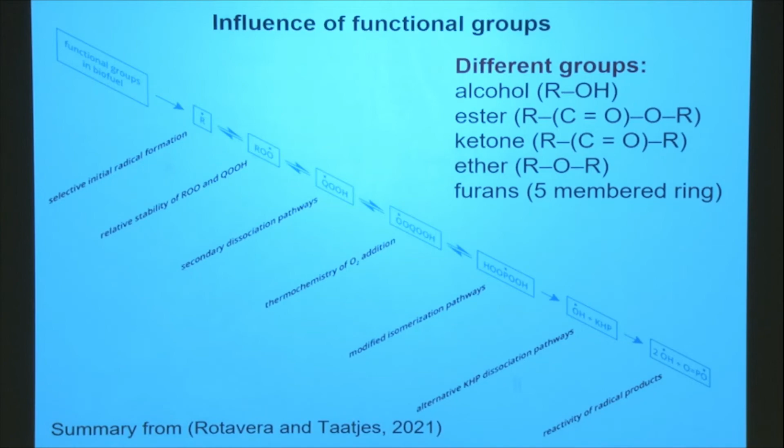So we've got a lot of different possibilities for the different chemical structures of the biofuels to impact on the low temperature chemistry.

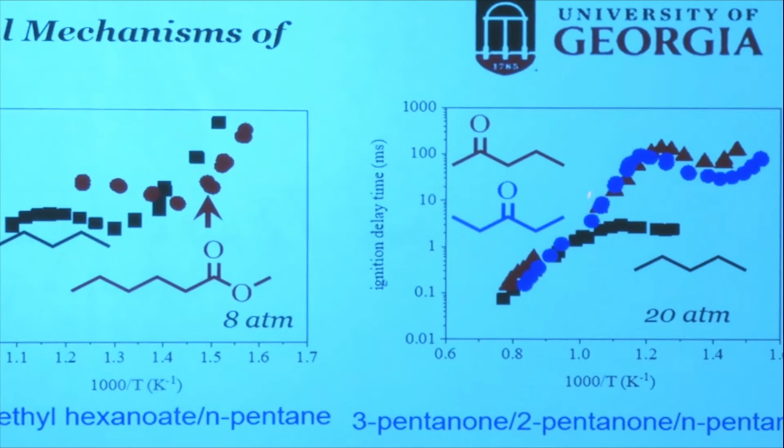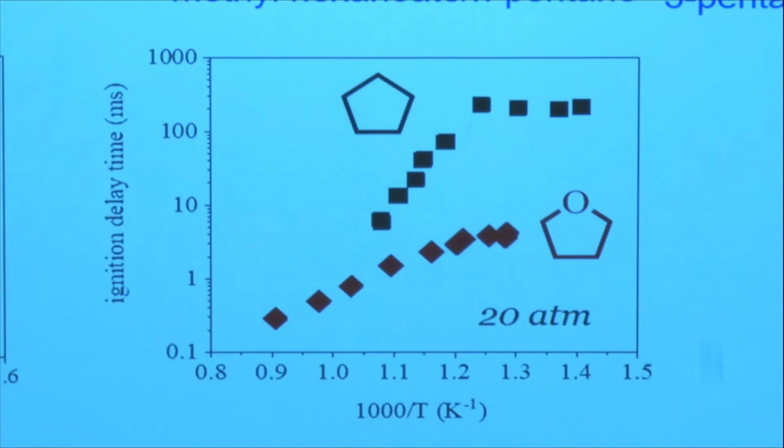These changes to the functional groups in the molecule do create challenges for mechanism validation. Fuels are more complex than the surrogates we use for gasoline and diesel in some ways, and the mechanisms we're creating to describe these biofuels are quite large, so that's a lot of reactions to populate using fundamental kinetics. This isn't going to happen in a finite time, so we're going to have to use some of the methods I talked about earlier in the week to populate this data - group additivity for thermochemistry, for example, and functional groups and rate rules for the different reaction classes.

So I'll go on now to change files and show you the case study for the example we've looked at, because it's quite interesting to have tried this within an automatic mechanism generator and see the problems we ran into and how we solved them. Well, not we - Christian, the postdoc, solved them.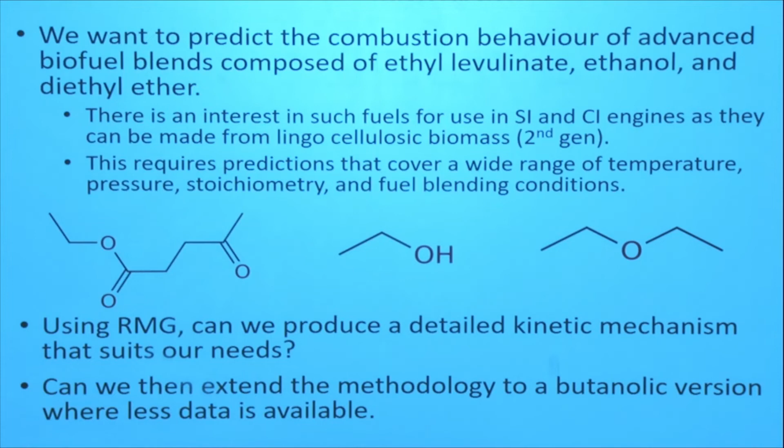So the idea was to develop a way of producing this blended mechanism in RMG that we can then translate to the butanolic version. Ideally, what we wanted to do was start with nothing and just ask RMG to do it. To do that, we basically put into RMG - we always have a base mechanism, which I'm pretty sure is the Aramco scheme in RMG - and then we just put in our fuel molecule and several of the early radicals in that low temperature branching chain, just as SMILES descriptions. And then we just ran it to see what happened.

So there are several problems. There are gaps in the database for the functional groups we were interested in, and it doesn't seem like it's going to be possible to make this happen without any kind of seeding of the scheme. In RMG, you can give it a seed mechanism which at least contains some of the reactions you're interested in, or think might be in the combustion reaction chain, and then it will go and look for further pathways and complete the job for you. So the seedless attempt basically just doesn't give us any low temperature chemistry - that was a sort of failed first step.

And also, what's concerning about this is that we don't have equivalent seed mechanisms for the butyl levulinate, for example. So we're going to have to make them.

So then, obviously there was massive scope for further improvement, and so even with the seeded mechanism, there was still scope for improvement. What Christian discovered was that the RMG database was quite lacking in training reactions for the groups that are specific to our oxygenated species.

So the alcohol group for ethanol was fairly well represented, but the ethers, esters, ketones needed a database update for a lot of the reaction families that we want to include.

So hydrogen abstraction is an obvious one for the start of the low temperature sequence. So hydrogen migration, cyclic ether formation, radical recombination.

RMG will allow you to add information if you have got training data, for example, for reaction classes, or training data that will relate to thermodynamic information. So it's got the tools to do this, it's just quite a tedious effort. This is Christian's work, not mine, so I'm just finding it interesting, and he's putting all the effort in. I'll show you an example on the next slide.

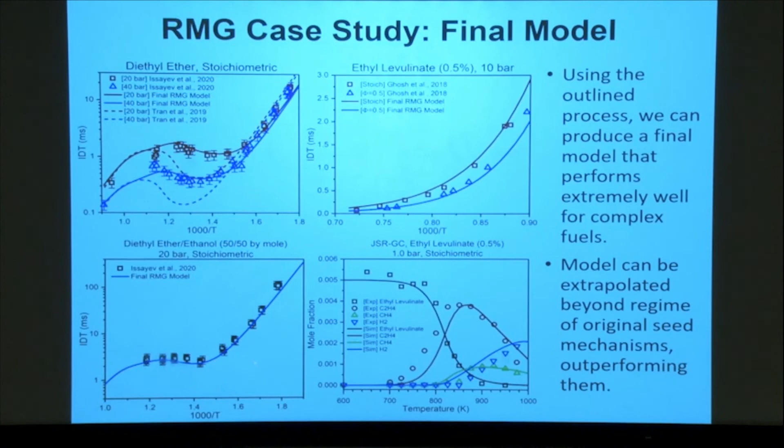Having gone through all of this, it's taken quite a long time, I've got to say. I'm glad it wasn't me doing it. But if you do a careful job, then actually we found that you can get a pretty sensible mechanism out of RMG.

So now we're just basically gathering data to do validation comparisons. We've got ignition delay times for the component fuels, for diethyl ether, for ethyl levulinate. We've got species data for ethyl levulinate from a jet stirred reactor. We're doing quite a good job of simulating this.

Actually, ignition delay times for at least the bimixture of diethyl ether and ethanol, compared to the seed mechanism we used, which was the Tran mechanism, if you remember, we are doing much better having applied RMG than the original seed mechanism we started with, including all the updates we've made. So I guess the conclusion is that it's been quite laborious, although it will be quicker next time. We've now got the experience, but the model can now be extrapolated beyond the regime that the seed mechanism was, I guess, at least partially tuned, probably. So I think we're reasonably confident in the mechanism we've got.

Not exactly sure where we're going to go with the butanol version of this, because we will have to estimate some rate constants to get a seed mechanism there.

So what do we learn? Mechanism generation is not a black box. Most of these things are not, right? You do actually need some expertise to apply these. So there was some careful human interaction involved. But actually, the generator does provide some tools to help you with those common sense checks. And sensitivity analysis, which is local sensitivity analysis freely available in Chemkin, also provides you with some tools to do that.

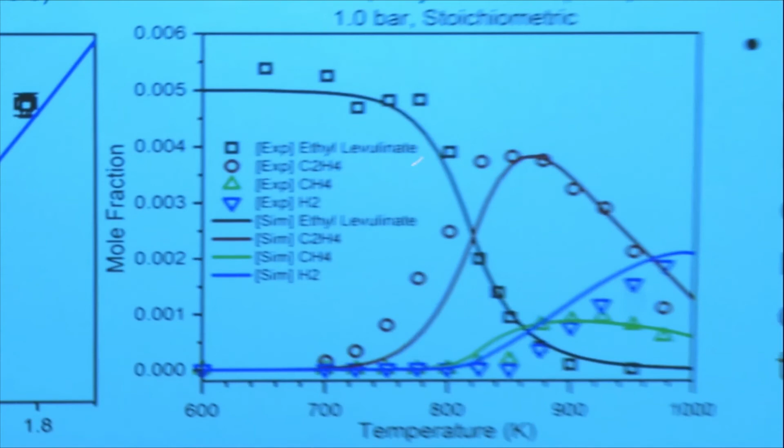The data in the literature for these molecules, particularly for the levulinates, is pretty sparse, but I think we were pretty satisfied with this, because the mechanism we used as a seed wasn't able to predict very well these concentration profiles, so we were able to improve on that. But if people are aware of more data, I'd be very happy to try comparisons.

I can't hear, sorry.

The question is, is there any particular reason why diethyl ether is part of the blend? We're basically following on from some work that took place at Trinity, I think in collaboration with KAUST. They were looking at this ethanolic gasoline blend, and the idea is that we can tailor the blend through the production process by changing process parameters to give us different percentages of the different blends. Of course, they all have different low temperature chemistry and cetane and octane numbers, so by tailoring the blend we should be able to tailor the combustion properties of the blended fuel.

The question around ethers is an interesting one. One reason why I think the original ignition delay time data for the blends had to be redone was because diethyl ether is an escape artist.

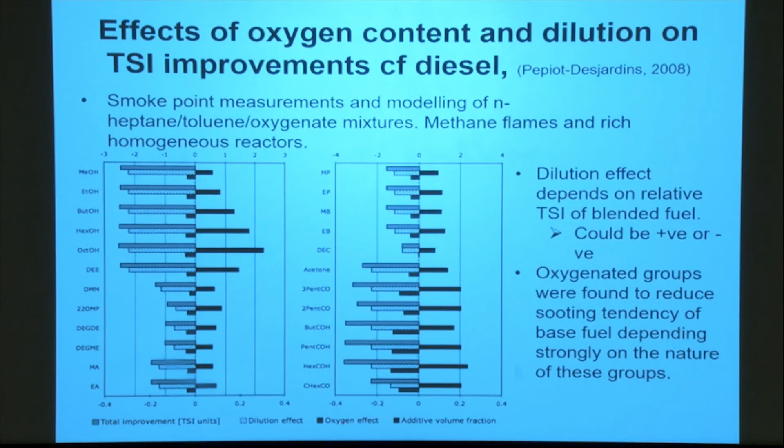That might be down to two different effects. It might be down to just dilution effects, where we're diluting what is a shorter chain molecule by blending it with a longer chain molecule, like is contained in gasoline and diesel. And then we might have oxygen effects: adding oxygen to the system might help prevent the formation of rich zones, which would lead to the buildup of aromatics and therefore soot.

So this was an attempt, for a large number of potential biofuels, to look at changes in the sooting index and whether they're likely to be due to dilution effects or due to the additional oxygen effects. You can see that the additional oxygen effects are larger for some of the longer chain alcohols, like octanol, for example.

So we just had a question about ethers as a fuel. Ethers have nice combustion properties. DME and DEE have quite high cetane numbers, and they're quite favourable in terms of emissions of particulates, for example, from engines. But they have high vapour pressures, so the smaller ethers are very difficult to blend with liquid fuels.

I'm not sure how far this has got commercially or how far the rollout has got, but Volvo developed a specific DME engine for heavy goods vehicles. Basically, this is what it required: a specific engine that can operate using these high vapour pressure fuels.

So I talked about generation earlier. I think I'm going to skip this plot. I did talk a little bit about DME oxidation yesterday and some of the problems we have in accurately predicting methyl formate in this reaction sequence, but given the time I'll skip the complexity of that.

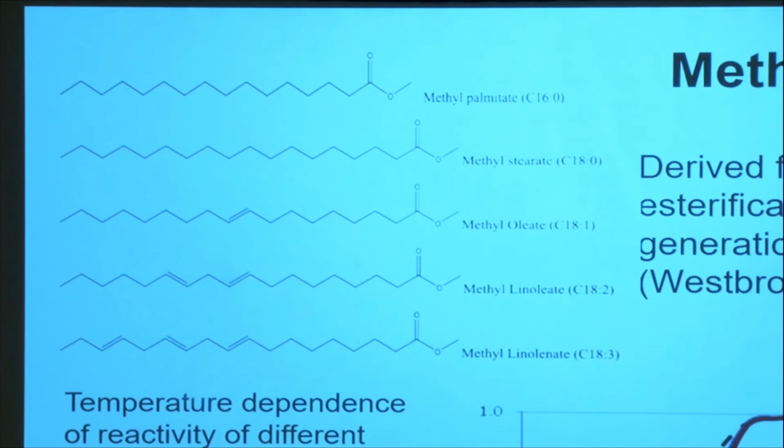I think probably the last point to make here is about tailoring fuel blends. One potential for doing that is with the methyl esters, which will be components of biodiesel. Again, the carbon chain length, the functional groups, and the presence of carbon-carbon double bonds is going to influence the low temperature reactivity of these different fuels.

Here you can see the relative level of conversion of the different fuels over the low temperature range for the different potential biodiesel components. You can see that the linoleate and the linolenate have a much reduced low temperature reactivity, so very little conversion until we get to about 650 degrees. That's because they have the presence of more of these carbon-carbon double bonds, which is reducing the low temperature reactivity of these fuels.

As we move up towards the carbon chains that have fewer double bonds, we see more low temperature reactivity. That might have an influence on how we want to blend fuels and what the overall cetane number of the blends might be.

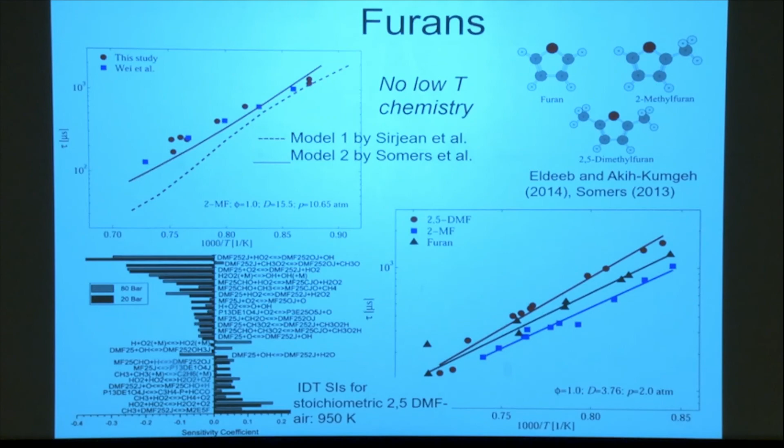I'm going to skip the bit on furans, sorry.

Going on to these tailoring fuel mixtures then: we said that basically we can tailor biofuels, biodiesel, and power-to-liquid fuels by trying to optimize the process conditions during the production process. That gives us the opportunity to tailor fuel mixtures, potentially to even optimize that process to give us a final outcome in terms of cetane number, for example, or octane number if we want a gasoline blend.

The downside of this is that I showed you that list of fuel properties - there's a lot of properties to optimize. And what we don't want is to find a result where there is no optimal blend that will become a drop-in fuel to reduce our dependence on fossil fuels.

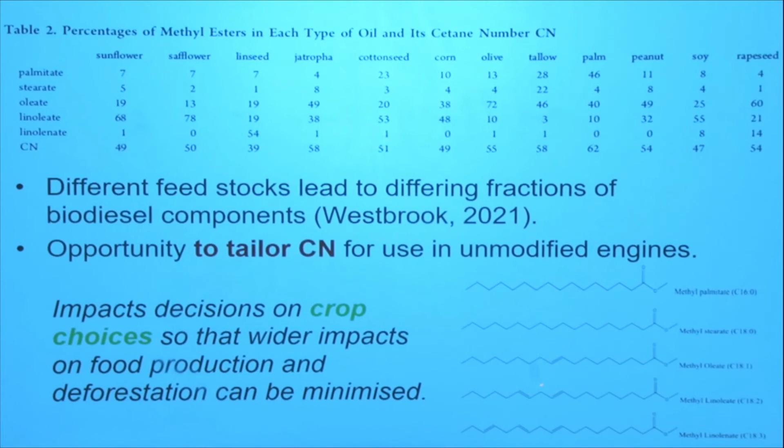So let's have a look at the potential for biodiesel blends. We've got various different feedstock sources for our biodiesel blends - sunflower, linseed, corn, palm oil, peanut, or whatever. These each lead to biodiesels that have different proportions of the component compounds, which are these long chains with varying numbers of carbon-carbon double bonds, and that will affect the overall cetane number.

If we take the linoleate, that's going to have a lower cetane number because it's suppressing the low temperature chemistry. So let's see one of these - palm oil has a high cetane number.

Sorry, the double bonds are suppressing low temperature chemistry. Palm oil has a high cetane number because it has a high proportion of palmitate, which has none of these carbon-carbon double bonds. Whereas if we pick linseed, it's got a higher proportion of linolenate, which has all the double bonds suppressing the low temperature chemistry, so it's got a lower cetane number.

So potentially, different feedstocks are going to lead to differing fractions of these components, and that gives us a chance to tailor the cetane number to match the diesel that we want to blend with.

We want to be looking at around 50 - so a direct biodiesel from a linseed blend would be too low a cetane number for a drop-in fuel, but it could be mixed with a blend from palm oil to give us an overall cetane number that actually meets the regulations.

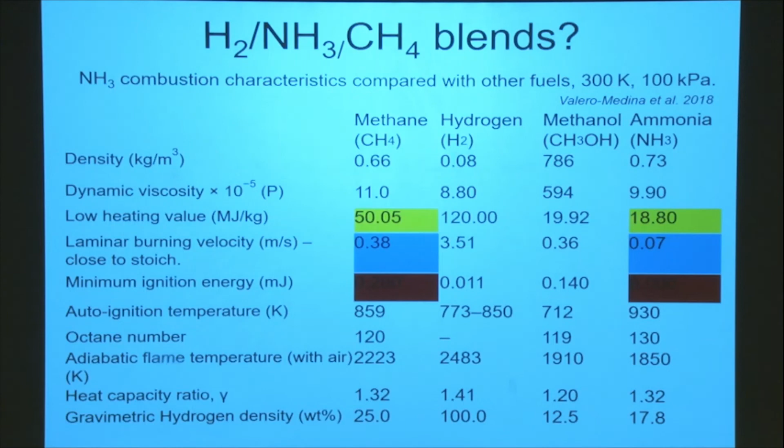So we've got problems with hydrogen because it has such a high laminar burning velocity and a low minimum ignition energy. So there is the potential to think about blends of these two things to try and average out these properties. And I guess the question is, I don't know if there's an answer to this yet or not. Can we come up with a blend of hydrogen and ammonia, or even maybe including some methane, that will allow us to utilise current facilities that we've got, so current gas turbine facilities? Because if we were able to do that, that would be such a massive advantage in terms of infrastructure costs for moving to a low-carbon economy. So I think there is probably quite a lot of effort going into answering this question. Can we come up with a blend of these fuels that will allow us to use current gas turbine designs? Don't ask me, I don't know the answer. I think this is probably ongoing research.

I'm not sure why at this point I put in a slide on DeNOx, so I think I'll just skip to final remarks at this stage.

There's a huge number of possibilities for alternative fuels, either from renewable electricity or from biomass resources, and I think that's one of the issues in this field. We need to optimize multiple characteristics to get the best fuel. We want the biggest reductions in CO2 equivalent emissions. We've got to meet physical property requirements for the combustors that we want to use. We might be able to match some of the combustion properties through blending, and then we want to design to minimize emissions from the combustors. So the question is, how do we make optimal choices? If I'm presented with a pile of corn stover, what should I do with it? How do I know what the optimal use of that particular feedstock is?